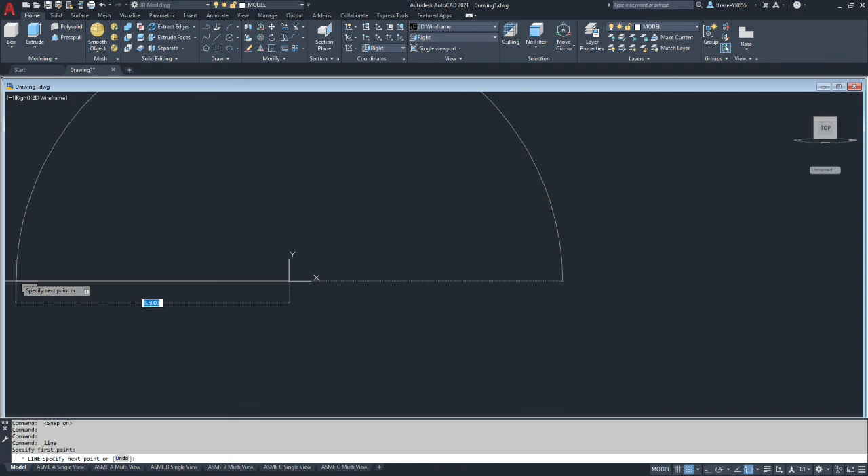Now, as I have often started, I tend to use a lot of offsetting of lines. So we're going to start at 0, 0, 0, and we're going to draw a line to the left. Okay. So this line that I just drew represents a center line. It's what we're going to revolve the shape around.

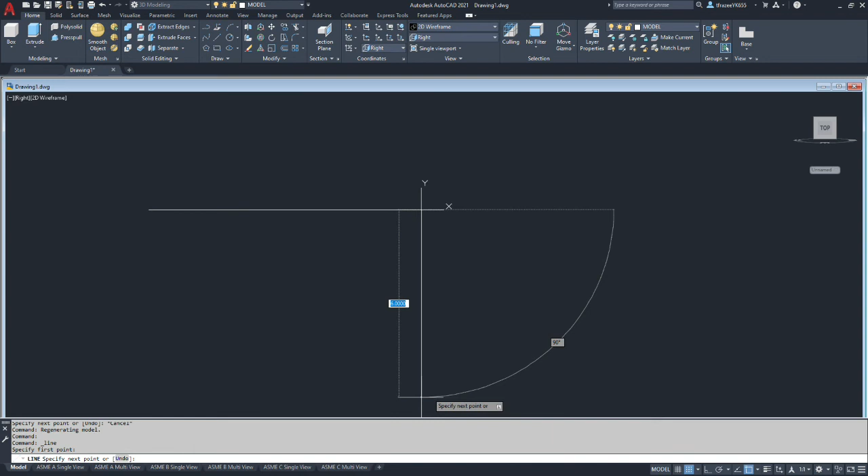I'm going to draw another line vertically, and we can use that to offset in the other axis. And this is going to represent what we would say is probably the back side of our pulley. So now we want to start offsetting construction lines.

And I'm going to start with offsetting what would be the smallest diameter on this shape. So our drawing says that we have a 2¼ inch diameter hole going all the way through the part. So we'll start with that diameter. And we're going to be spinning this, so anything we do is a radius, and when we spin it, it'll become a diameter.

So we're going to go to offset, and if we were to offset half of 2.25, that'd be 1.125. And we'll offset the horizontal line down. And that makes up our smallest diameter. And then we'll go to our next smallest diameter, which would be the counter bore, which is, according to the drawing, 3½ inches. So we repeat our offset command, but this time we're going to put in 1.75, which is half of 3½, and we'll offset our same baseline.

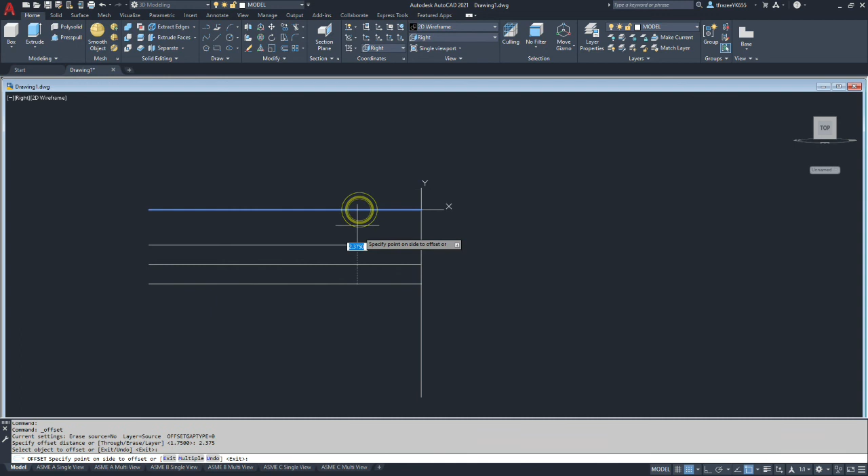Our next smallest diameter on the drawing is 4.75, so we'll go ahead and offset that one. And we need half of that, so it's actually 2.375. We're going to offset that line. Okay, so we've got a few of the lines. I want to start defining some corners so that we're taking shape here. Okay, so from the back, our first offset would be 0.87, so 870 thousandths. So go to offset 0.87

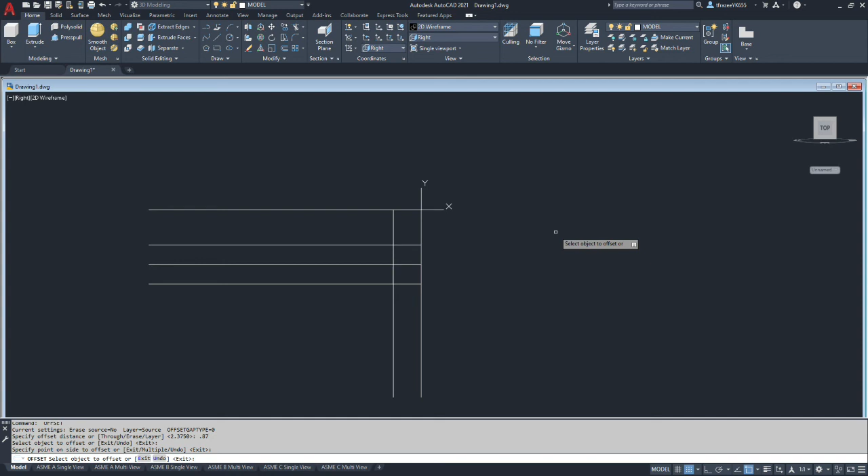and offset in. And then our next profile that's on the outside of the part, which would establish the overall width of the part, is 6.75. And our counterbore depth is 1½ inches.

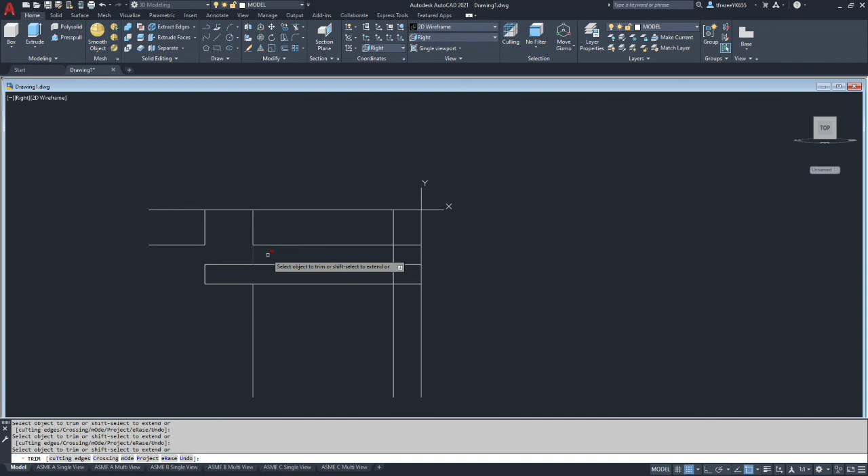Okay, so I'm going to do a little trimming so you can make sure that you're starting to visualize what we're doing here. So let's go to trim, and we're going to trim off the corner here, here, here, here, here, here.

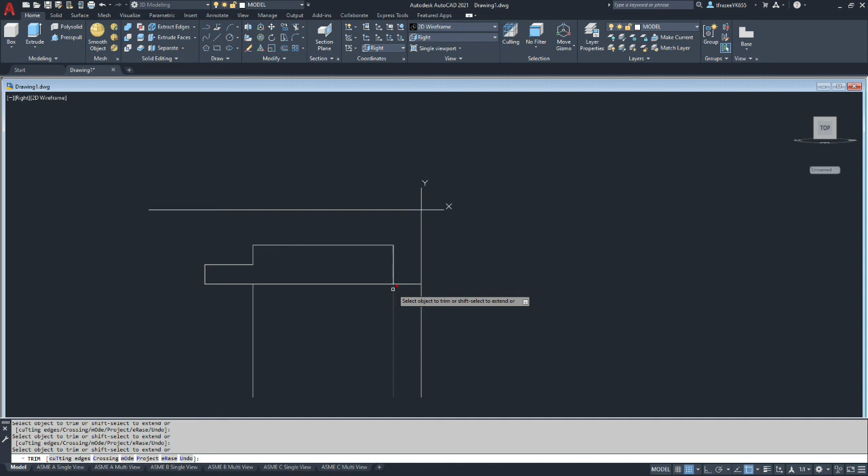Okay, so what we have developed so far is this is the center bore and this is the counter bore geometry. And this line here is the end of the boss at the center of the part. So we'll go ahead and trim those off. Okay, so we're going to keep working off the back here. We've got our ending at 4.75 diameter boss, and then where you jog inward, that next step is 1 inch and 3/4 from the inside, or from the back of the part.

And we can draw a line with ortho on to the left, and that gives us the outside edge of it. Okay, so now we're traveling towards the outside diameter, and our next largest diameter on the back side of the part is 10 inches. So we're going to go to that next largest diameter. It's 10 inches. And it's actually half of that, so we're going 5.

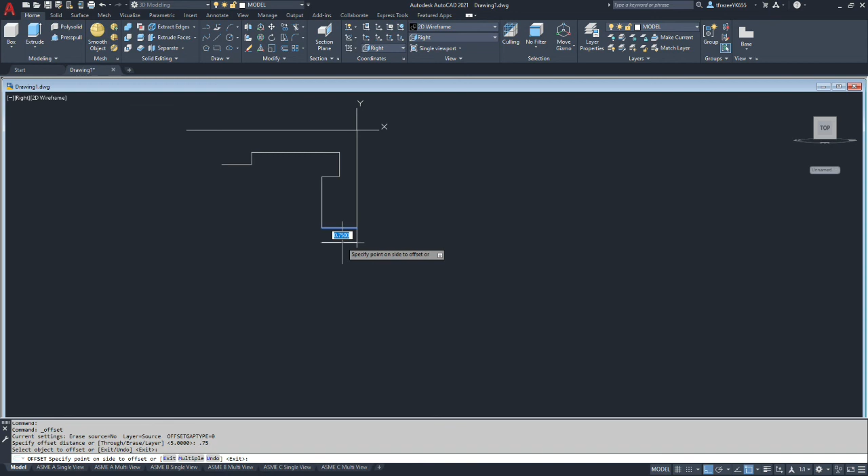We now switch from diameters to an offset. So we're going to offset a wall thickness on this of 0.75. We don't have that number because it's a true wall thickness, and that gives us part of our outside rim. Now outside of that we have a flange rim, and it appears to be another 1/2 inch.

So we'll take the line we just created, and we're going to go up a 1/2 inch. And it's also a 1/2 inch from the back. Okay, so to generate the shape, you do a little bit of extending. And extend those two lines. Okay, we need to do some trimming.

We're going to trim off said line there, said line there, the line on the back of the part. There we go. So now we're starting to build an outside diameter rim. Now let's build from this outside rim, and we'll end up connecting up with the other side.

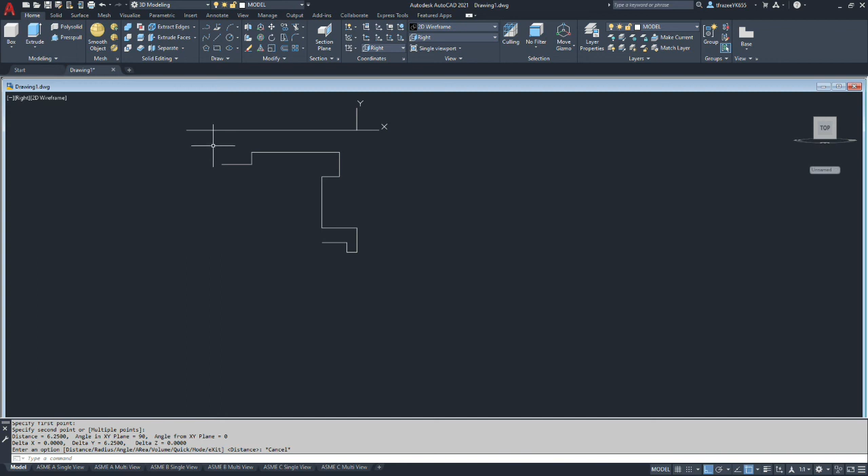Okay, so we have a ledge here, and then we come back out for an additional 1/2 inch flange. So the overall width of that feature is 4.5 inches. And we're going to offset from the back of the part 4.5 inches. We can then offset back a 1/2 inch.

And then we can connect the endpoints, and then we extend and do one more trim. Okay, so now we have the outside rim of our pulley. This is where, on the pulley, if we had a belt, it would run.

Okay, now we need to start building in the opposite side. So we then have a recess, and the wall thickness should be common. So our line can come back in from the end because we had already trimmed it off with the wall thickness. And the floor on this side is 2 3/4 inches from the back.

So we're going to do an offset of 2.75 from the very back of the part inward. And we need to extend that line to give it projection. And we'll go ahead and trim off the corner.

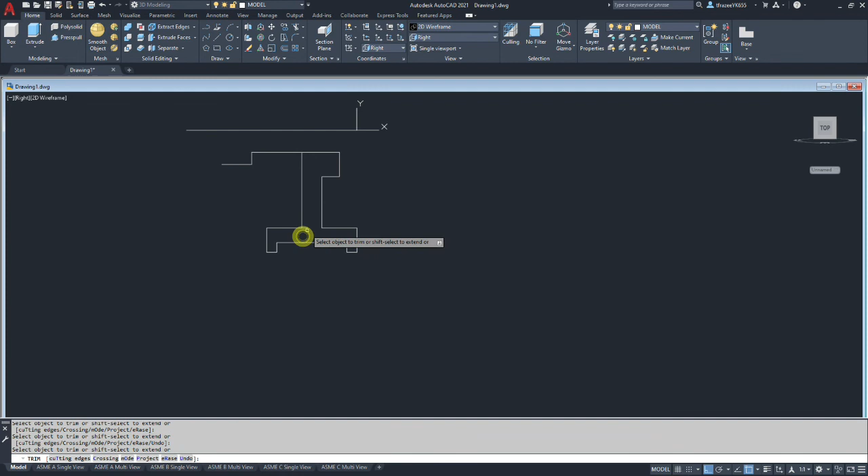Okay, so we've wrapped around, and then we have a substantially large boss that comes up on the other side. And that boss diameter is 6, so we need to offset 3 from center line because that's half its diameter. And this creates our intersection. That's the bottom of that flange. So we'll go ahead and trim that up.

And we've already established the overall width of our part. So we can connect to our counterbore, draw a line down, and then trim those respective entities off. Okay, so now we have the center of rotation and we have the bulk of our shape that we're going to revolve. There's one more step we want to do.

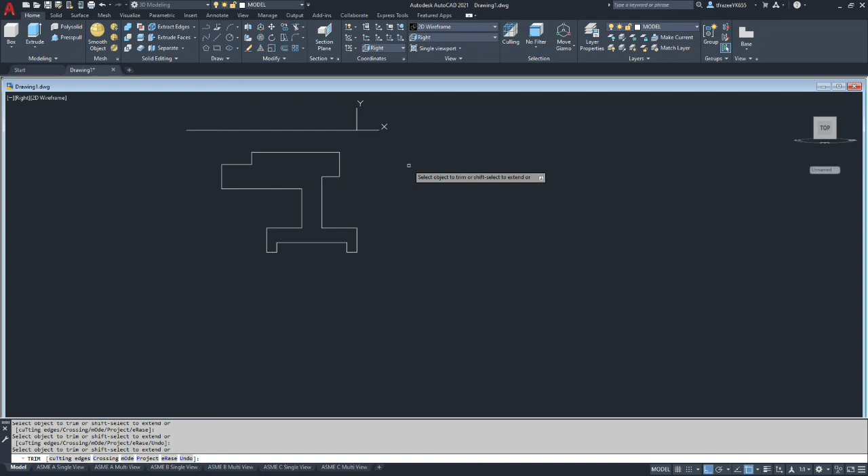AutoCAD behaves a lot better with fillets in 2 dimensions. So we're going to put in our fillets at this stage as opposed to the model stage, and when we revolve it, they'll already be there. Now it appears that there are 12 locations we need to put that fillet. So we're going to use the sketch fillet command, and we're going to set our radius by typing in R for 0.25. They're 1/4 inch radiuses.

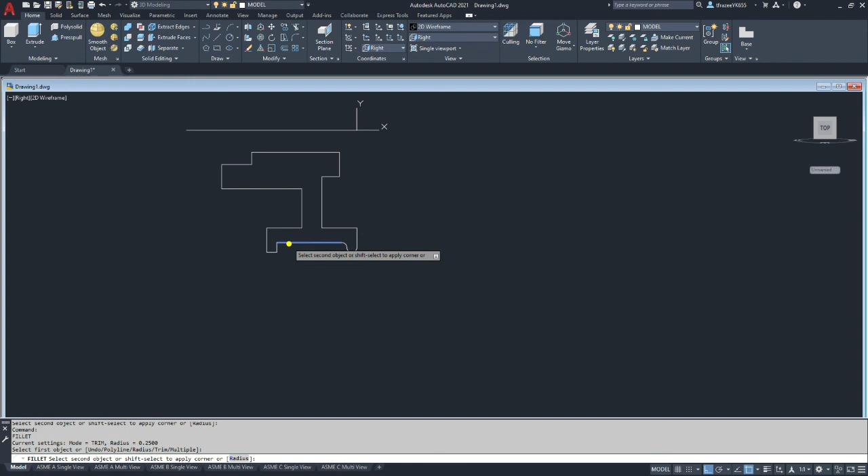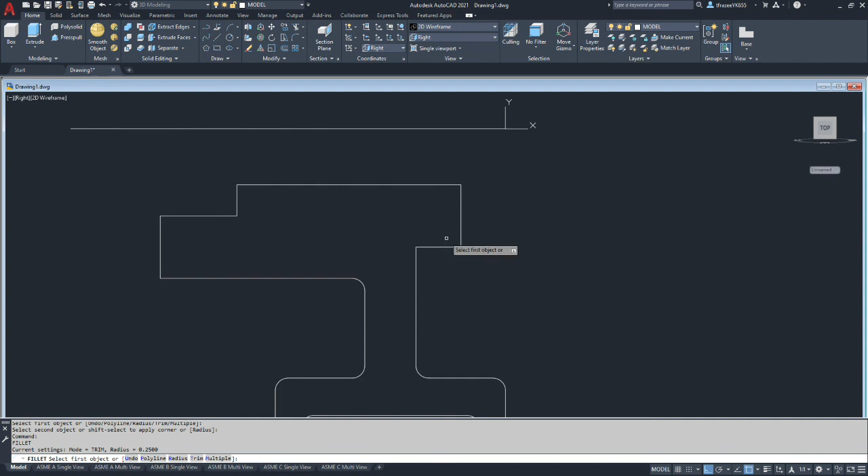And we are going to continue around the part. I'm going to start with the rim and work myself around. It's not modal, so I'm pressing enter every time I start a new fillet. That looks like that one's sharp. Now we can come back and do the inside. And then we'll do the transition there.

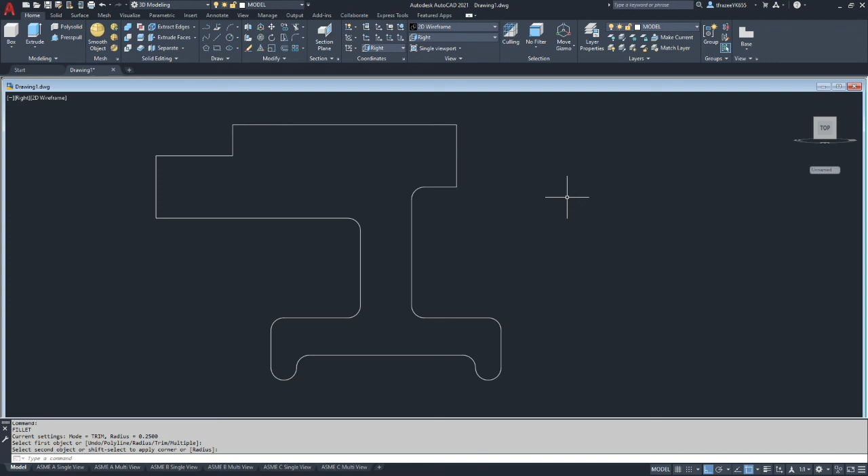That should be it. So let's count them up. 1, 2, 3, 4, 5, 6, 7, 8, 9, 10, 11, 12. Okay, 12 places. And if we revolve this shape, the main body of the part model will be completed. Okay, and so we're going to use the revolve command. It's a solid command. And for that, we need this to be all one region.

So you could create a polyline out of it. That's another method, but I'm going to use the region command. So we go to region, and it's saying select the entities you want to become a region, which I have. Hit enter. We don't want to include our revolve line. And now we want to do our revolve in an axis that's 90 degrees to this line.

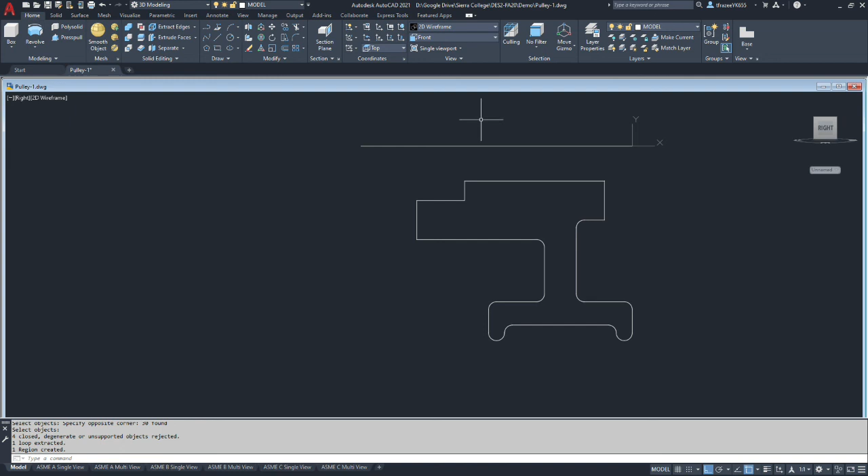So we are currently in the right side view. We want to revolve around the front view. So we're going to go to front, and then I like to go to a three-dimensional view when I'm doing solid work. And you can see our revolution in our profile.

You're going to pick revolve. It's saying, what do you want to revolve? I want to revolve this profile that I just selected. It's highlighted in blue. And then I'm going to accept it. And the mode I want to use is object.

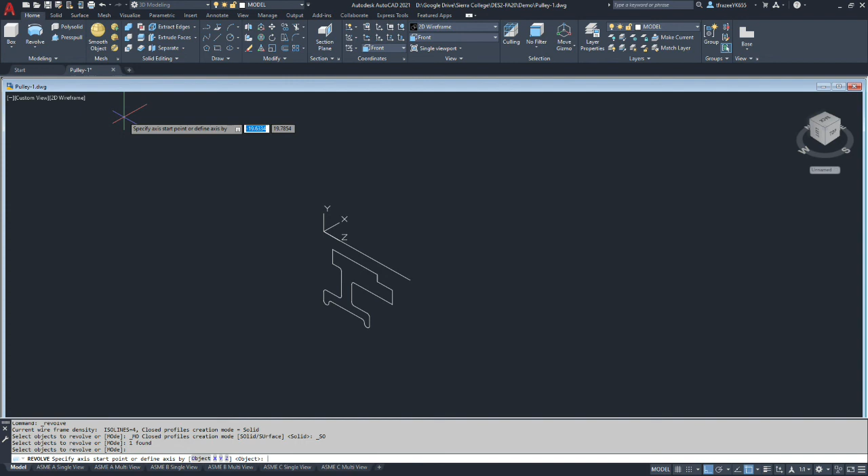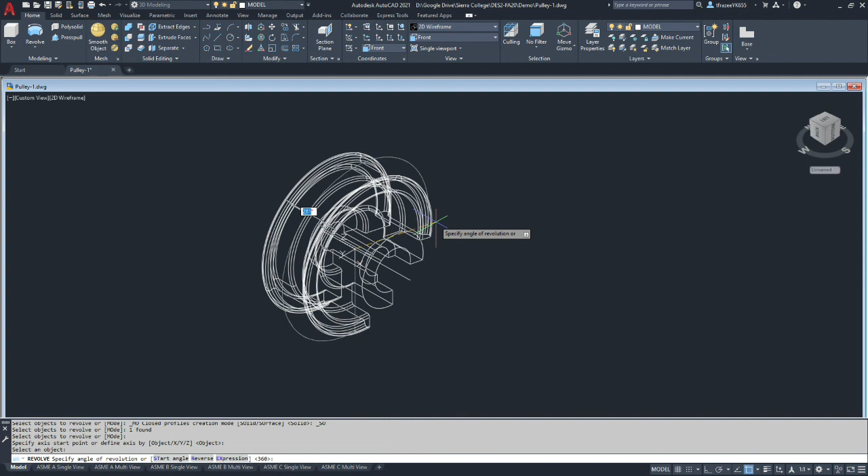I want to define my rotation center around the line that we created. So it's going to be object. And we're going to select the line. And you could stop the rotation anywhere. If you actually wanted to make, say, a quarter section and grow that part, you would stop at 270 degrees, but we're going to go 360, and we have our revolve.

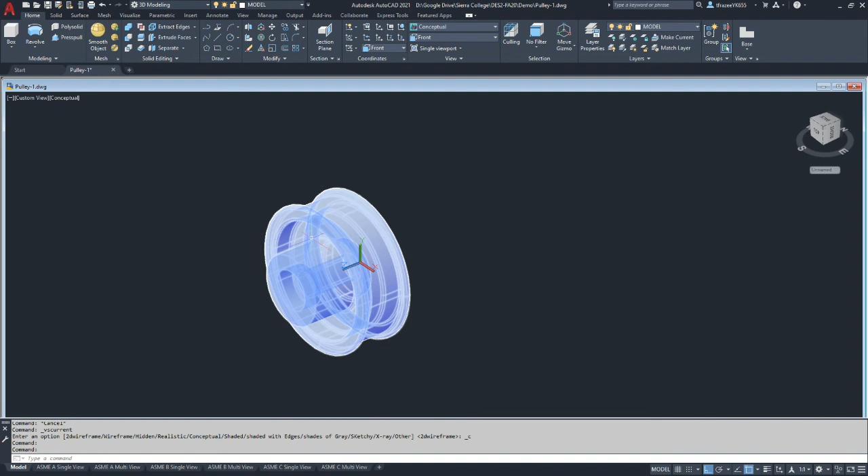Now let's switch to a conceptual view, and you can see what we've created. Now revolve that section all the way around, and we've made our pulley. Okay, so that's the last step in the revolve section. Now we need to put in some hole patterns. So our drawing has a hole pattern that goes in the face of the part.

Okay, so we want to look at this in front, and we want to draw a geometry that will make up our pattern. Now we could use a press pull in a series of circles, but I'm going to use what's called an array command, so we haven't used that. And let's go back to our wireframe,

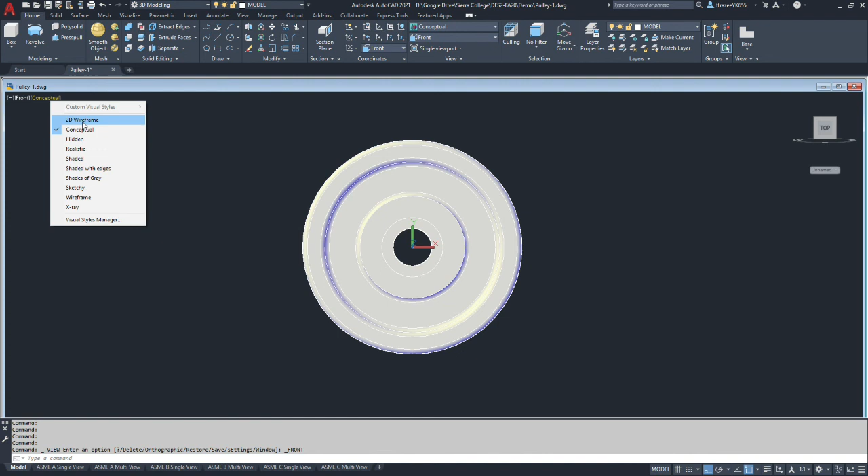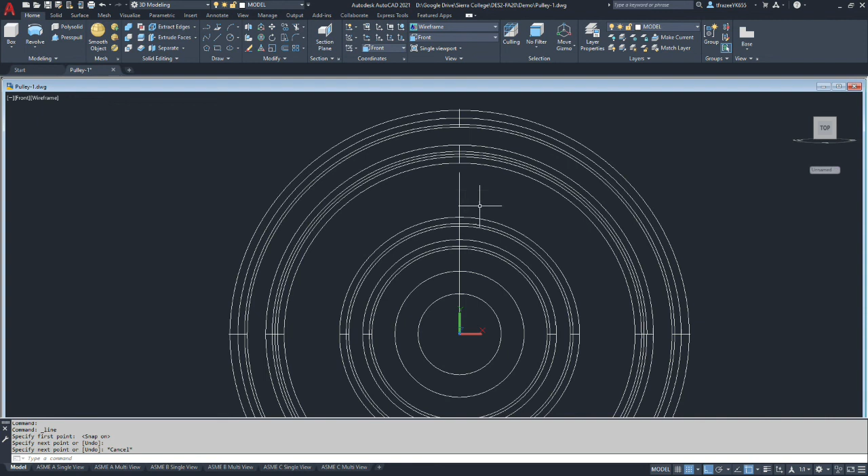and we want to draw a line from origin straight up, and it can go about that high. We're going to take that and we're going to go horizontally from its endpoint out. Now we can place the first hole here on top where the intersection of an offset line hits this line.

So our bolt pattern diameter is 7.5, so we take that number in half, which is going to be 3.75. And offset our line. So our first hole should be right there. So we're going to draw a circle.

I'm going to turn off my grid snap here. And it's going to be at the end point. And we're going to switch the diameters. And the diameter of our hole is supposed to be 3/4 of an inch, so 0.75. And we've now placed our hole. Now that we've done that, let's get rid of this extra geometry we've made, construction geometry.

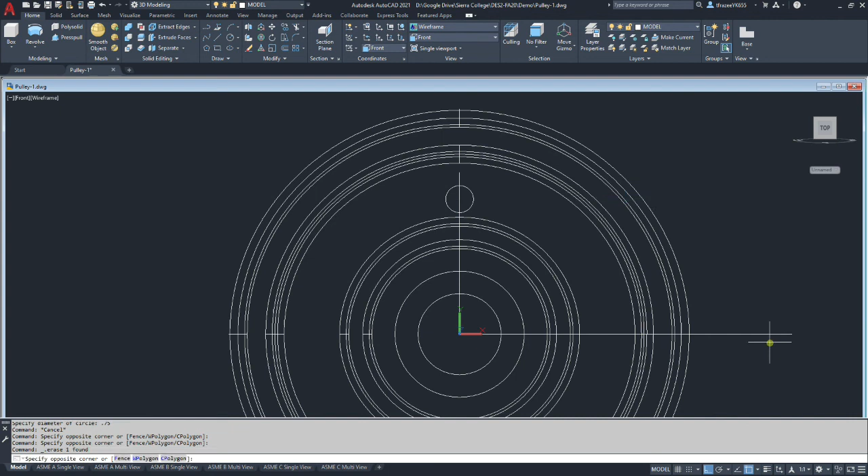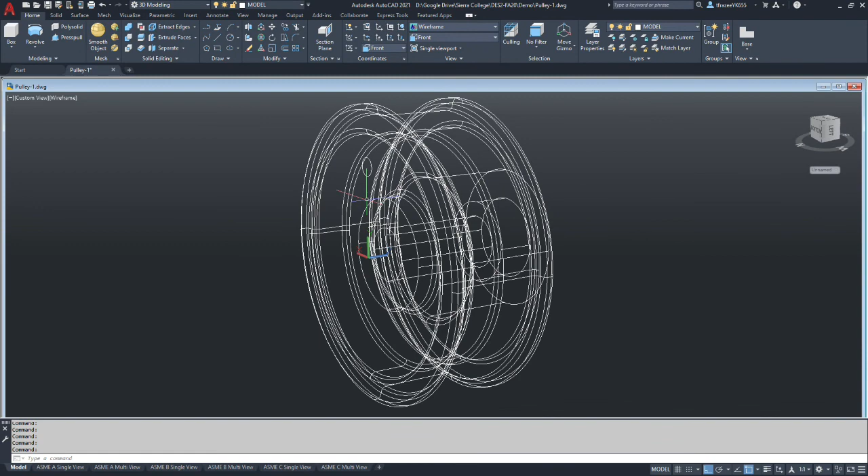And I'm going to look at it in a different view. So we've constructed that in the plane of the back of the part. So now what I want to do is I want to create a cylinder out of that. So we're going to do an extrude, and we're going to pick the circle.

We'll hit enter, and it's just got to blow through the part, which the section we're going through is less than 4 inches. So let's just do 4, and we've created our first body that we're going to use as a cutting body.

Okay, so we're going to select polar array. We'll select the object that we're going to array. Hit select enter to accept the selection. We're going to do an axis of rotation. And we're going to pick the first point of rotation, which is going to be origin, which is 0, 0, 0.

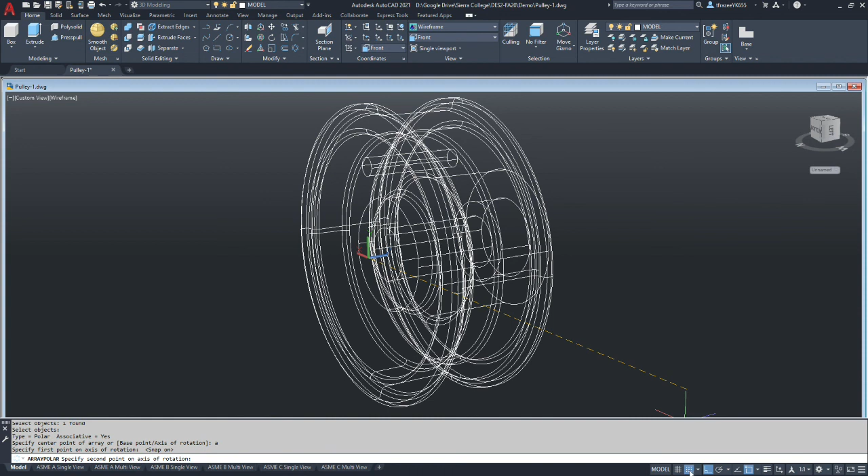And then I'm going to turn the grid off, but I'm going to leave ortho on, and we can pick a random place out here. Now it's previewing, and at this point we should be able to edit the array. So I'm going to type in items, and I want 6, and that happens to be what we want. It's going to evenly space them. So we'll accept the default of 6.

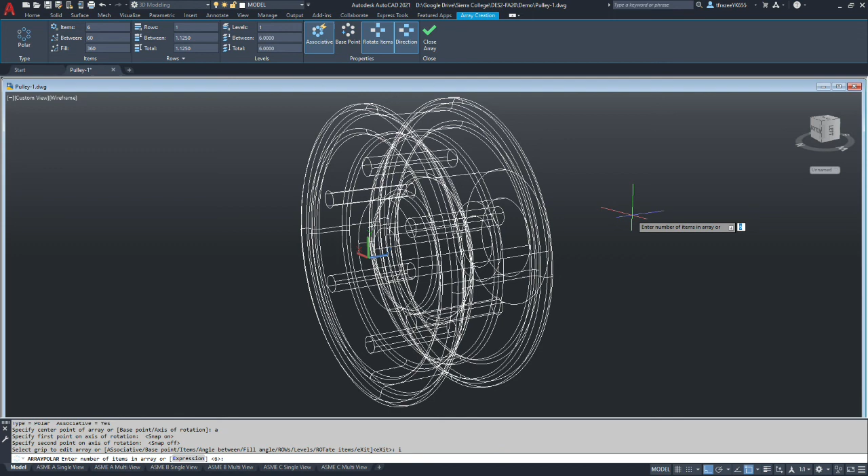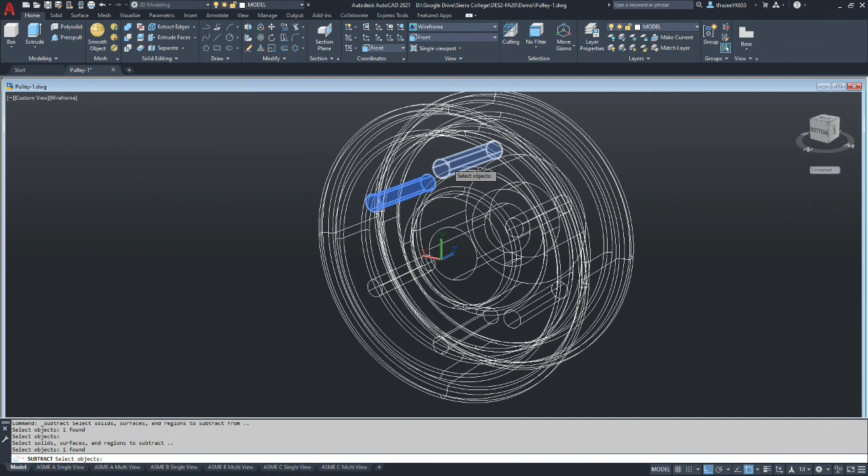Now we're going to use the solid subtract. We're going to select the object we want to subtract from. We're going to hit enter to accept that. Now it's asking for the objects that are going to be removing material. So we select our 6 cylinders. And we're left with our 6 holes. You've reached the end of the pulley section view drawing tutorial.